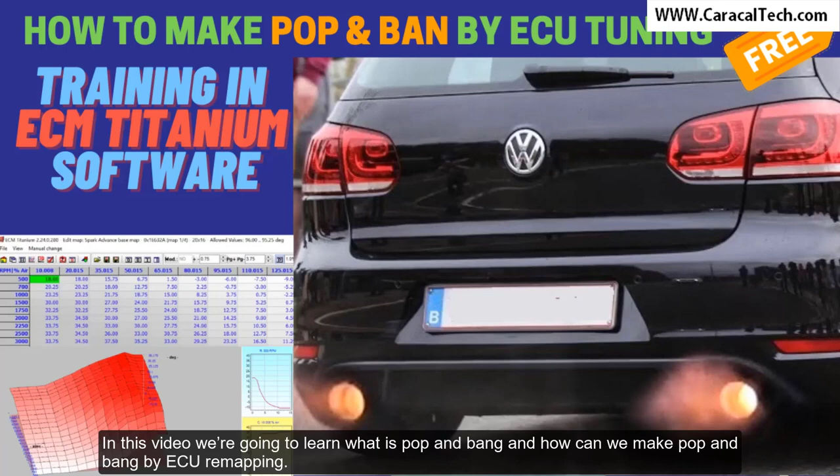In this video, we're going to learn what is pop and bang and how we can make pop and bang by ECU remapping. Our training example is for Volkswagen Golf VI GTI 2000 16V TFSI 211CV with Bosch MED 17.5 ECU.

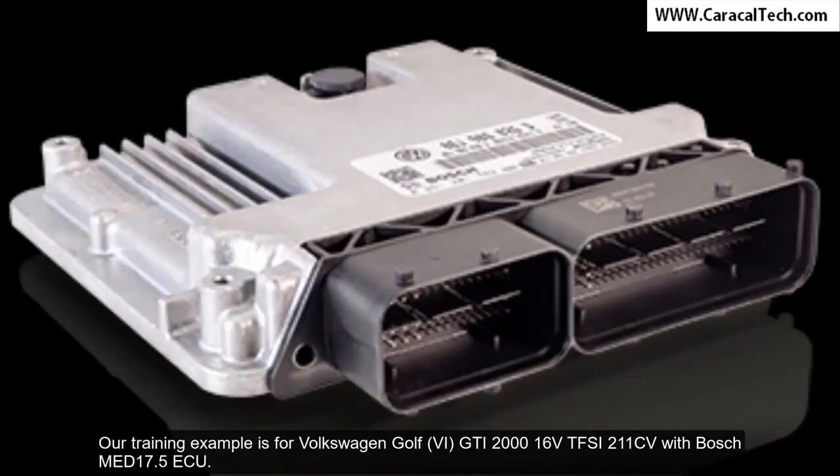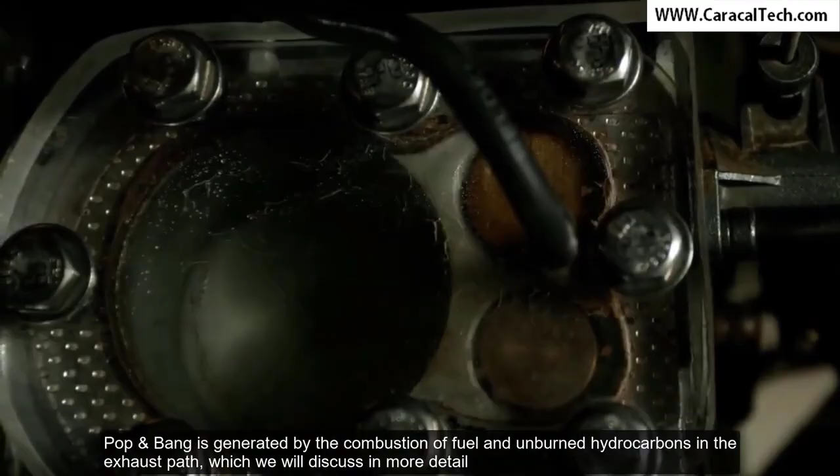First, we need to understand what is pop and bang and how does pop occur. Pop and bang is one of the fascinating phenomena in the world of car tuning. The fire coming out of the exhaust, accompanied by a burble explosion-like noise. Pop and bang is generated by the combustion of fuel and unburned hydrocarbons in the exhaust path, which we will discuss in more detail.

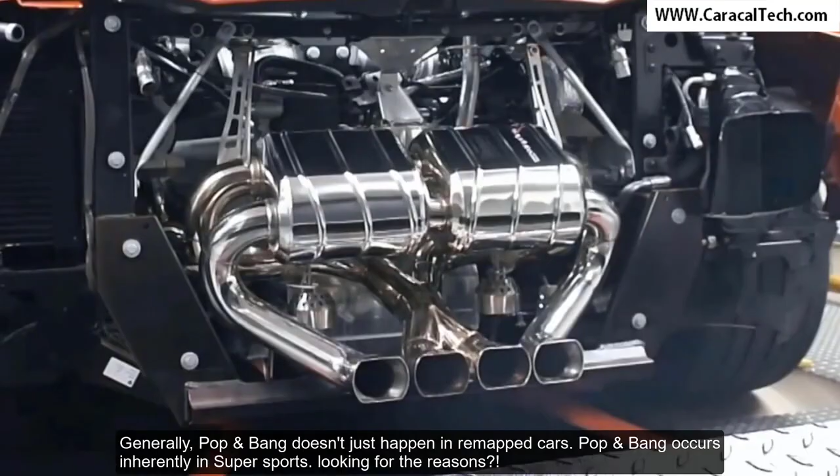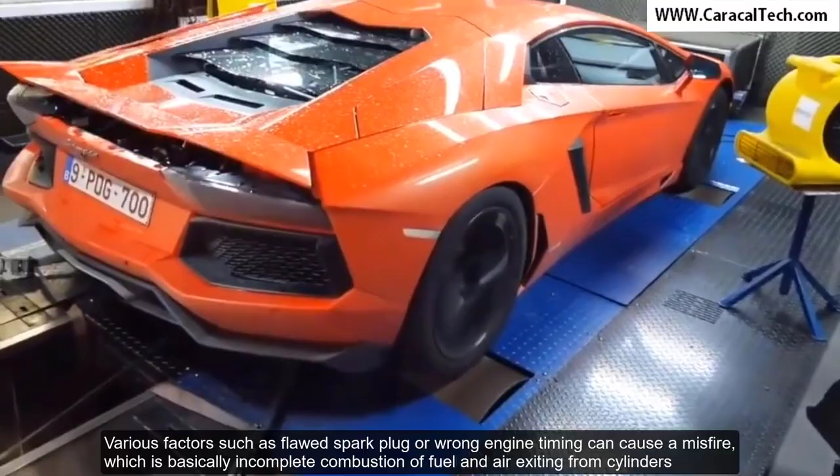Generally, pop and bang doesn't just happen in remapped cars. Pop and bang occurs inherently in supersports. Looking for the reasons? In these cars, the engine is often mounted in the rear, and they have a shorter exhaust pipe. Also interesting is that pop and bang can happen because of your car's problems. Various factors such as bad spark plug or wrong engine timing can cause a misfire, which is basically incomplete combustion of fuel and air exiting from cylinders. This can potentially cause the pop and bang.

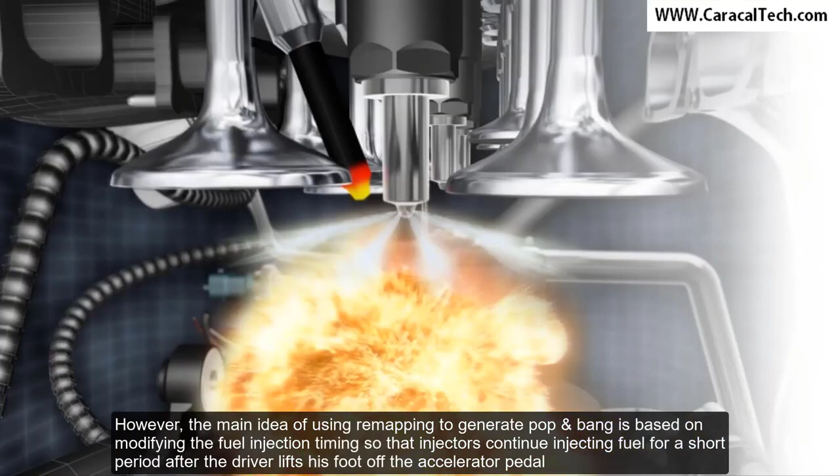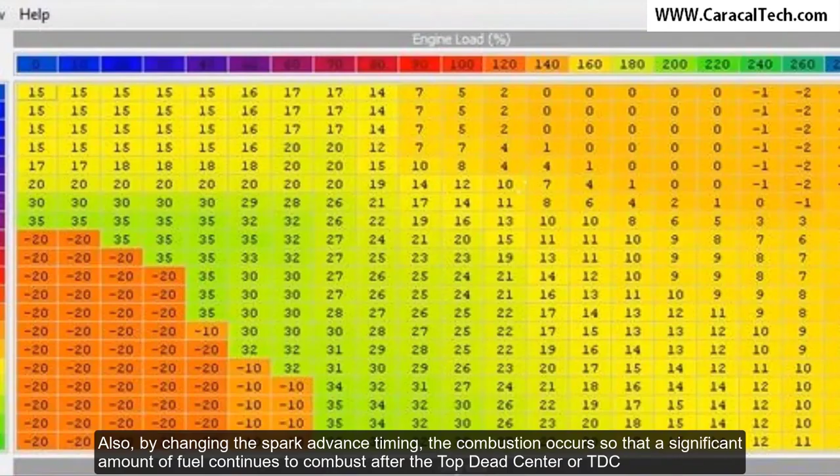However, the main idea of using remapping to generate pop and bang is based on modifying the fuel injection timing, so that injectors continue injecting fuel for a short period after the driver lifts his foot off the accelerator pedal. Also, by changing the spark advance timing, the combustion occurs so that a significant amount of fuel continues to combust after the top dead center, or TDC. Now, based on the given explanations, you can probably tell why sometimes you hear pop and bang by releasing the accelerator at once, or even by pressing and releasing the accelerator serially.

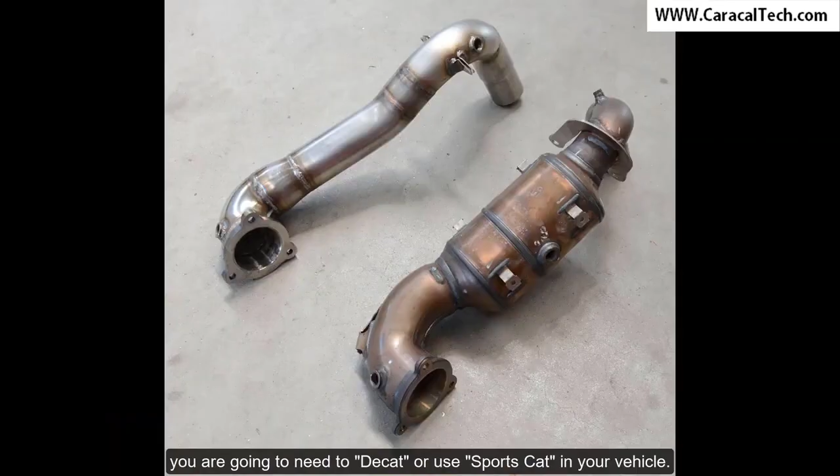Another point to note is that pop and bang has different levels. A milder pop and bang usually generates a softer sound of fire. And if you're looking for a more intense pop and bang with louder sound and more fire in higher levels, you are going to need to decat or use a sports cat in your vehicle.

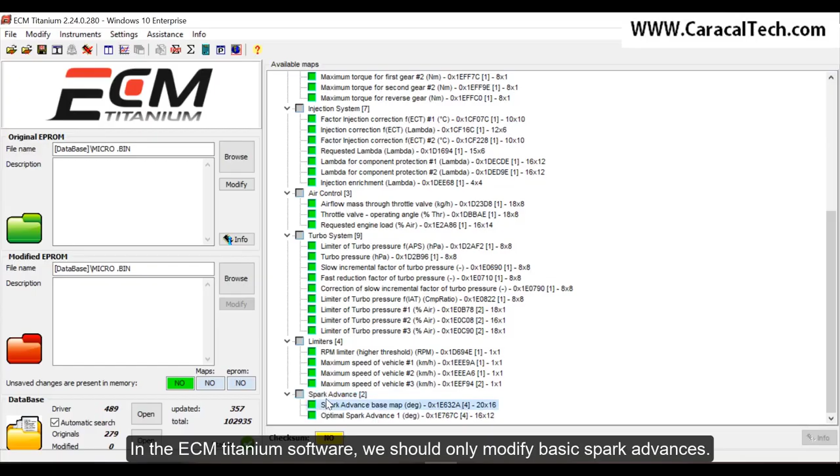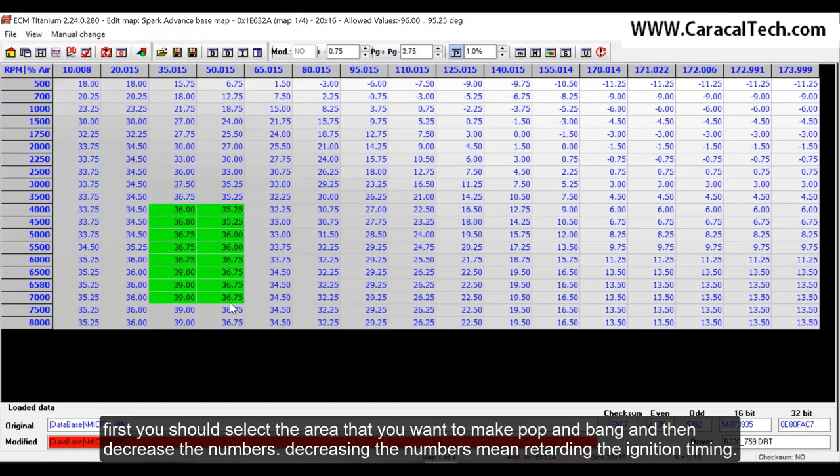How can we make pop and bang by ECU remapping? Simple. We can retard the ignition timing in the spark advance table when the accelerator pedal is released. In the ECM Titanium software, we should only modify basic spark advances. So I open the table, and you can choose from which engine RPM and engine load you want pop and bang. First, you should select the area that you want to make pop and bang, and then decrease the numbers. Reducing the numbers means retarding the ignition timing. When we retard, the spark plug will ignite the redundant fuel when the exhaust valves are open. Then, pop and bang.

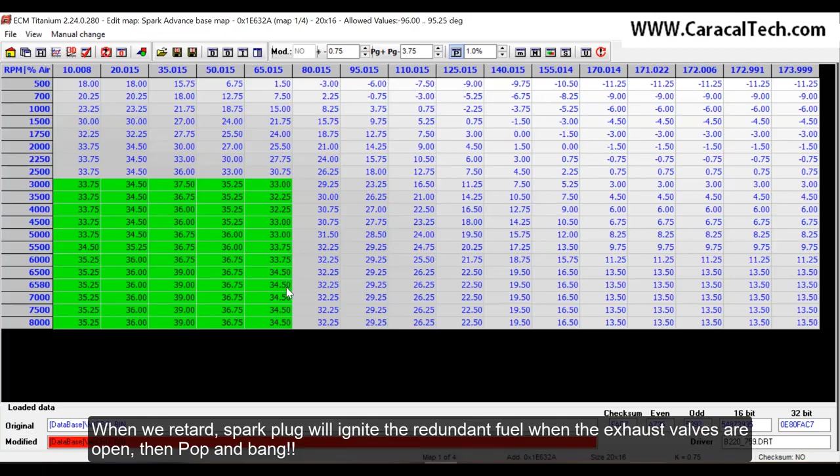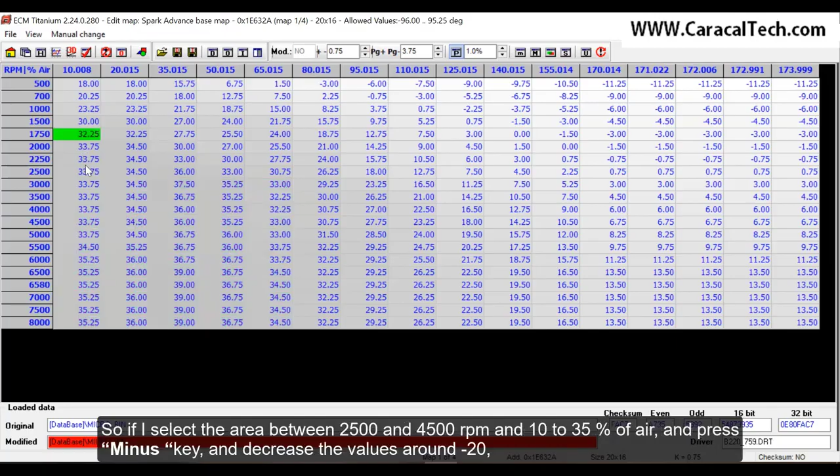As we said before, we can choose in which area of the deceleration mode we want to have the pop and bang sound. So if I select the area between 2500 and 4500 RPM and 10 to 35% of the air, and press the minus key and decrease the values by around -20, whenever the driver releases the pedal, in that area we have pop and bang. If we use numbers like -10 or -15, we will have burble sound instead of pop and bang sound.